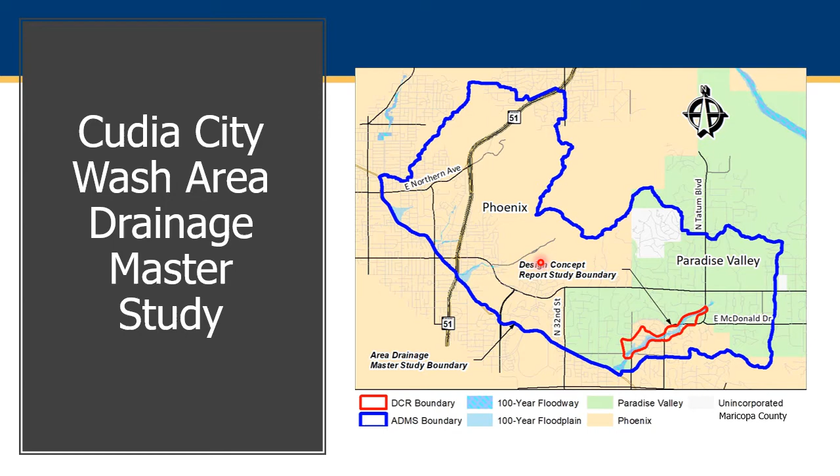The study area is approximately 14 square miles, and as you see on the map, it is located within a small portion of unincorporated Maricopa County area, the Town of Paradise Valley, and the City of Phoenix. Why are we doing this study? The district decided to prioritize this study for the following reasons. This watershed has not been studied since 1994. New development has occurred within this watershed. Also, new technologies are available to create more accurate mapping, hydrology, and hydraulic analysis. Since the summer of 2014, homes and infrastructures in the study area have experienced increased flooding. Awareness of flood hazards and risks can help residents reduce risk of injury, death, and property damage.

The following are the study goals and objectives. As I mentioned earlier, the study was completed in 2020 and was done as part of Phase 1. Currently, we are working on Phase 2 and preparing the design concept report for Cudia City Wash Echo Canyon Zone 4. This wash was identified as a potential significant flood hazard area in the study phase. As you see on the map, this is the location for the Zone 4 project, and it is within the City of Phoenix and the Town of Paradise Valley jurisdictions.

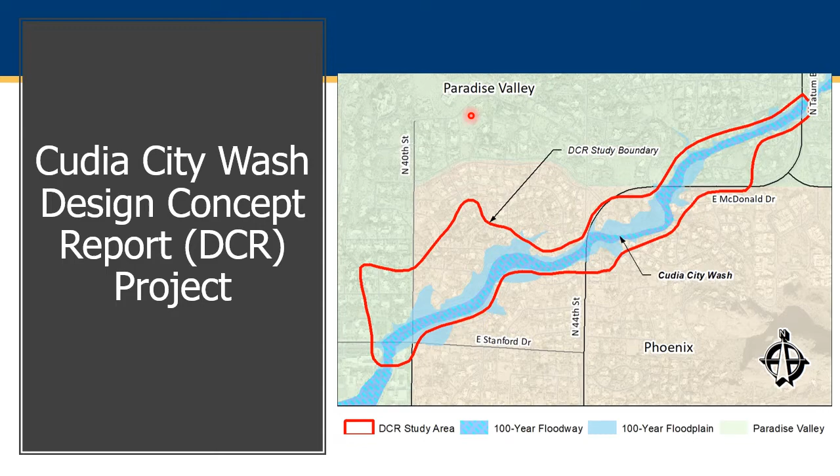The project goals are revising FEMA-designated flood zones as necessary to better define the flood risks, identifying potential solutions and costs to reduce flood risk by working with the City of Phoenix, the Town of Paradise Valley, HOAs, and residents. Based on the fund availability, we will determine when and how to proceed with the mitigation plan.

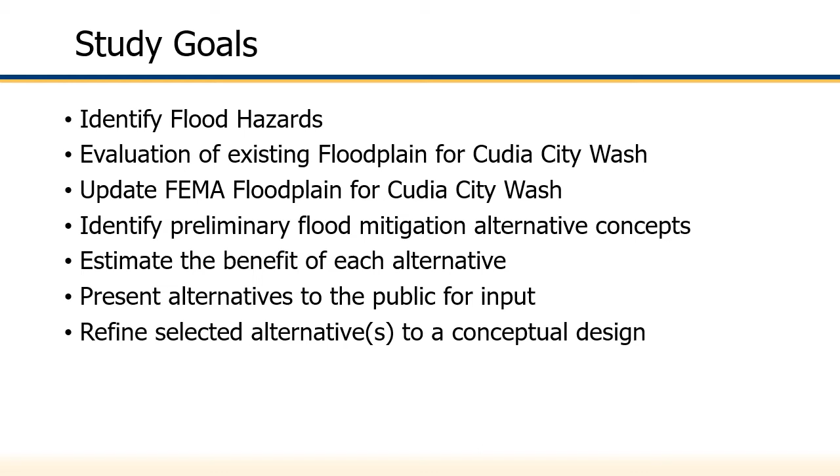As part of the Phase 2 study, we will also be conducting public outreach to seek public input for the developed mitigation alternatives. I will go over what has been completed to date and the project's next steps. We have created a comprehensive database of critical information, including known flooding and drainage areas from the City of Phoenix, the Town of Paradise Valley, stakeholder interviews, and comments received at the May 2019 public meeting.

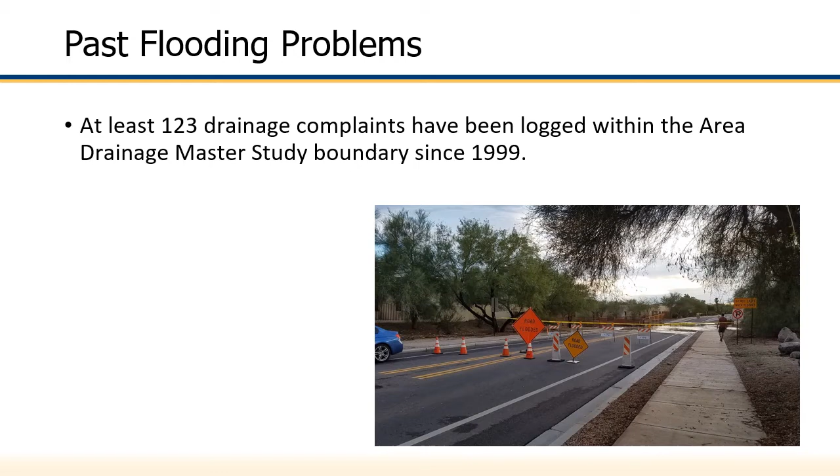We developed high-level recommended solutions to mitigate flood hazards for the identified flood-prone areas. And we evaluated FEMA floodplains within this watershed for potential to redelineate the existing one.

The next steps are to seek public input of the potential mitigation alternatives that were developed and are presented at this public meeting. Comments and recommendations from the public will be evaluated by the project team. We want to develop 15% plans associated with cost estimate and reports to mitigate the flood hazards and reduce the flood risk. Another public meeting will be conducted to review the draft FEMA floodplain redelineation and to share the recommended alternatives. Further technical analysis of the proposed alternatives will be required at the design stage.

And with that, I will hand the floor to our consultant, Rob Lyons from J.E. Fuller Engineering firm. Thanks. Hello, my name is Rob Lyons. I'm a civil engineer who works for J.E. Fuller Hydrology and Geomorphology, and we're currently under contract with the Flood Control District of Maricopa County to do the technical analysis for this design concept report.

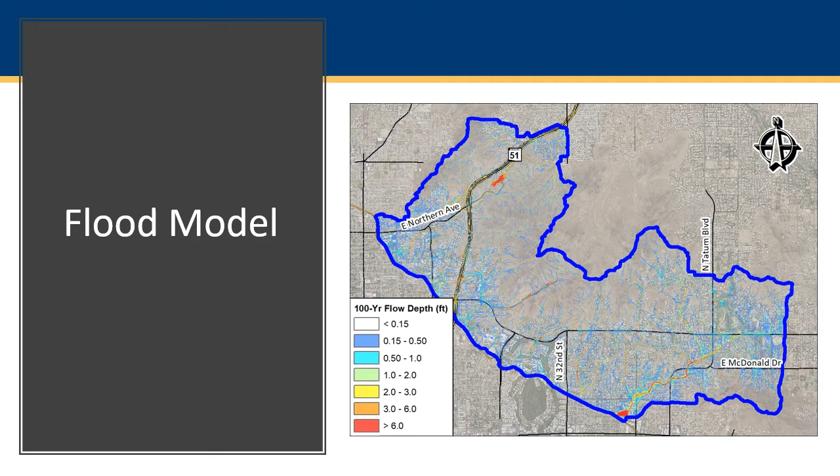A detailed flood model was developed during the Cudia City Wash Area Drainage Master Study that Lana previously mentioned, so we were able to hit the ground running using a model that was already developed. This model can simulate many types of storms, including actual storms that have happened around the Phoenix metro area, or it can model synthetic storms like the 1% annual chance storm, which is most well known as the 100-year flood. The 100-year flood, or the 1% annual chance storm, is the storm that has a 1% chance of happening in any given year.

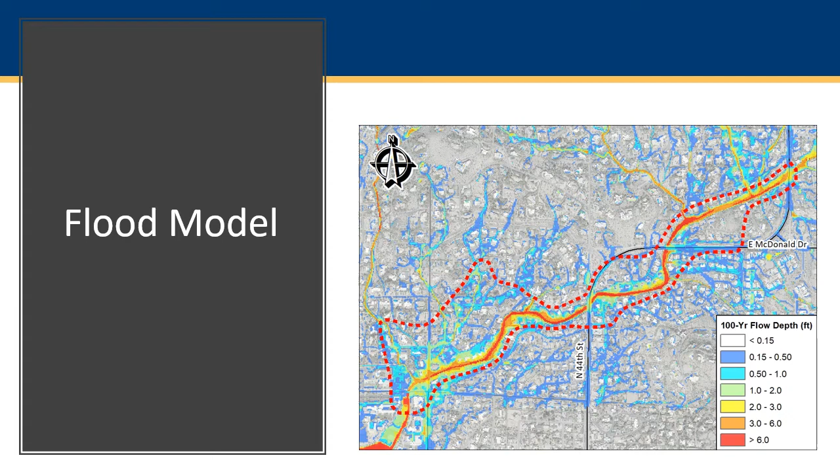This slide shows a zoomed in view of Cudia City Wash and the design concept report study area. You can see it goes from basically the Phoenix Country Day School on the downstream side to Tatum Boulevard on the upstream side. And also on the slide, you can see the 100-year model flow depths.

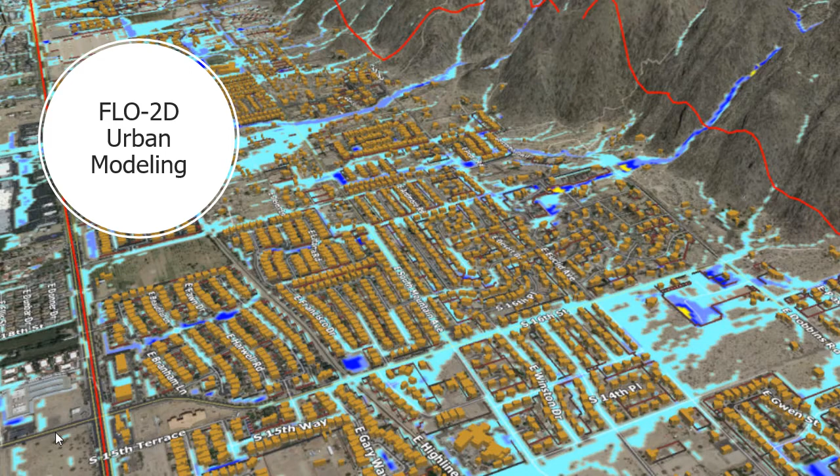The flood model that I mentioned is a two-dimensional model, specifically FLO-2D, which is capable of simulating both rainfall, infiltration, and flood routing. This image is from another study that the Flood Control District performed several years back, which simulates the floodwater running off South Mountain and inundating urban areas within South Phoenix.

The FLO-2D model is a very detailed model that's grid-based, and this particular model uses a 15 by 15 foot grid. So for each grid, you have model input such as terrain, infiltration, rainfall, culverts, buildings, walls, etc. And then the output is just as detailed with flow rates at each grid, water depths, velocities, or the speed of flow, and the direction of flow. The Flood Control District has been using this model for over 10 years and has found that the results are better than all past software applications.

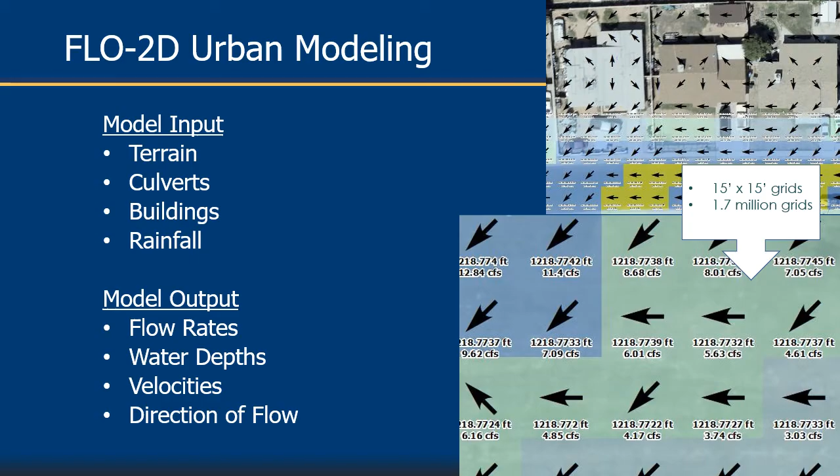This is a 3D animation of the flood model, or the 100-year storm, and we're zoomed out so you can see that the runoff's coming off of Camelback Mountain, Mummy Mountain, and the Phoenix Mountains Preserve. The model creates output at every 5-minute interval, so you can use the output or the flow depth results and overlay them in Google Earth to get a picture of where the source of the runoff and the flooding is coming from, as well as how the runoff is making it through the stream system.

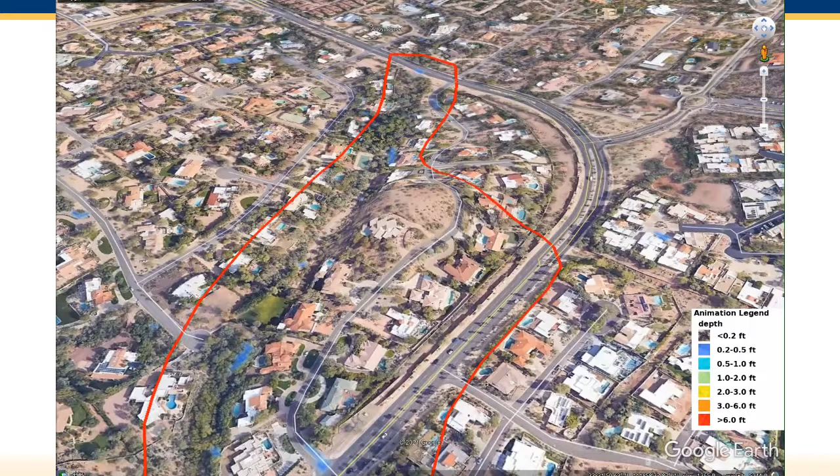Now we'll zoom in on different portions of Cudia City Wash. So this is the section that's in between Tatum Boulevard and McDonald.

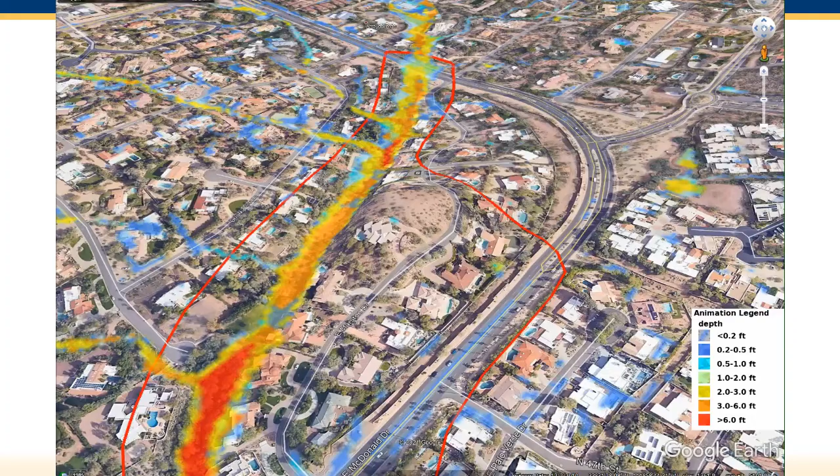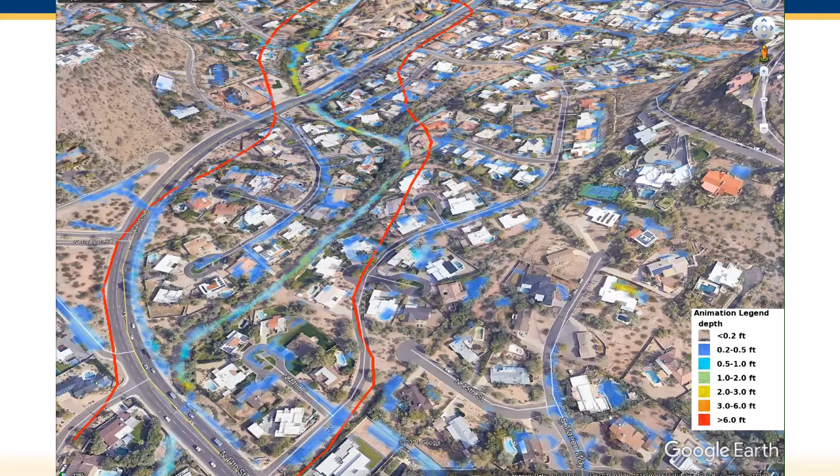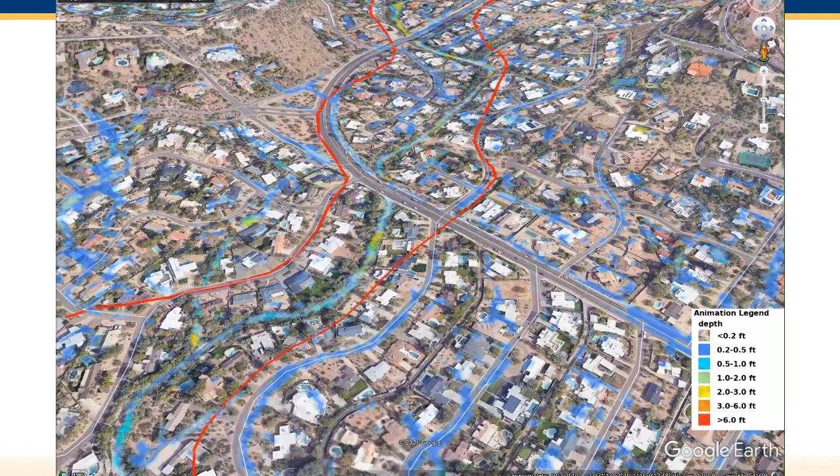And now we're moving in between McDonald and 44th Street. And here you can see that during the beginning of the storm, the water is mostly contained within the main channel, but as the flood starts to rise, it goes out into the floodplain and the overbanks. So this section is downstream of 44th Street. And now we're moving at the downstream end of the study near the Phoenix Country Day School at Stanford Drive.

A floodplain evaluation was initiated with the DCR to compare the FLO-2D model results to the existing FEMA floodplain. The results indicated that the existing FEMA floodplain may overpredict the 100-year flood extents. Therefore, the district, Town of Paradise Valley, and City of Phoenix agreed that the floodplain should be revised. This should have the result of removing some properties from the floodplain and potentially eliminating the requirement for flood insurance.

The draft floodplain should be complete in the fall of 2021, and the district, town, and city intend to present the results to the public before it gets formally submitted to FEMA. If all goes as planned this winter, the package could be submitted to FEMA for review and approval. Given that it's a federal government agency, it's hard to predict the number of comments they may have or revisions required and the approval process. So we're tentatively estimating the fall of 2022 for FEMA approval, and then the spring of 2023 for actually updated effective floodplains on the maps.

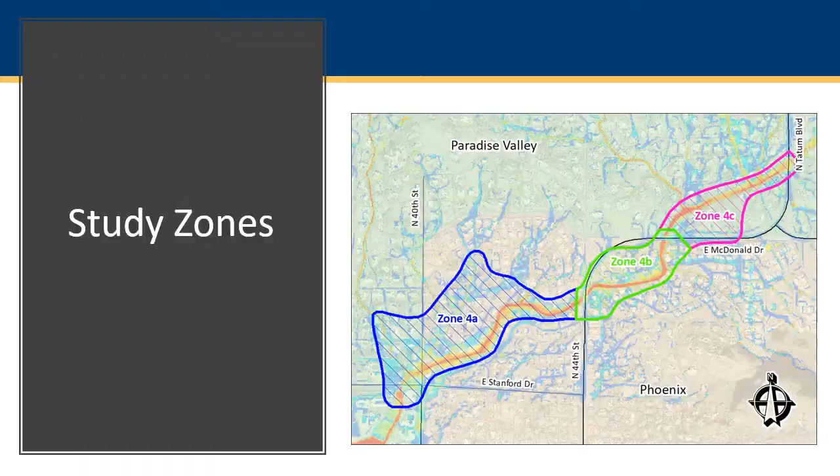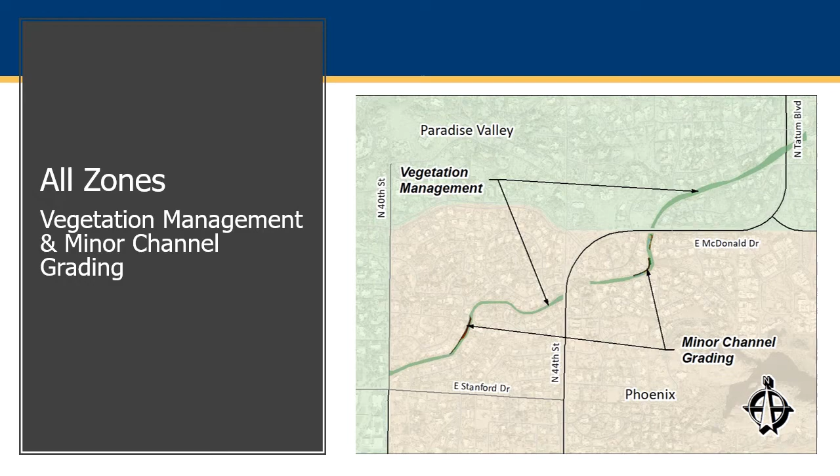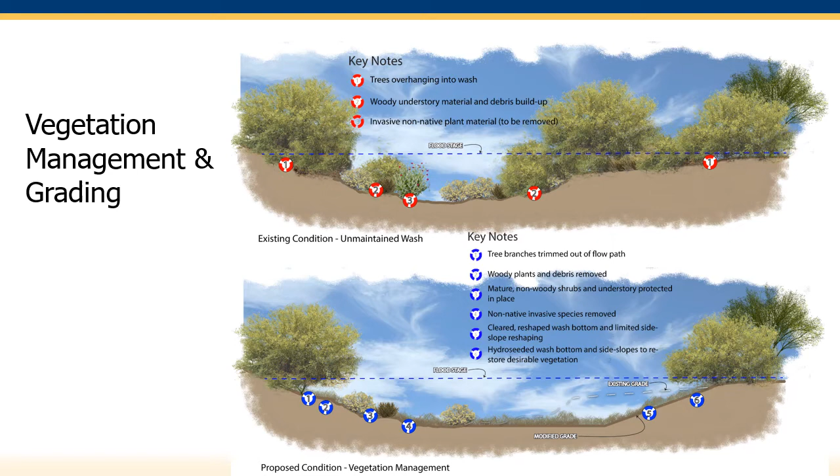The first alternative I'd like to present actually spans all 3 zones, 4A, B, and C, and we're calling it the vegetation management and minor channel grading alternative. There are 3 locations that would benefit from some minor channel reshaping. The vegetation removal would be limited to non-native or invasive species, and then trimming large branches and debris that's down in the low flow channel that's obstructing flows. This alternative would require the cooperation of the majority of homeowners to make sure that the vegetation is maintained.

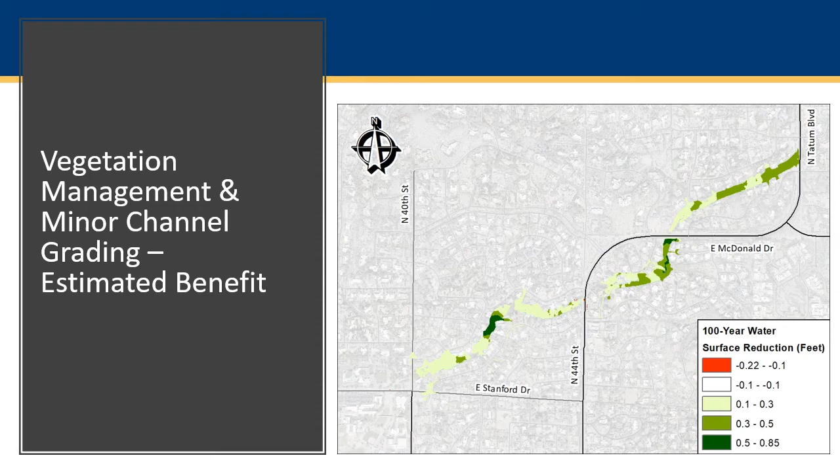The technical team has simulated the hydraulic benefits of this alternative. This slide shows the flood depth reduction assuming the project was undertaken. So for example, in the 100-year flood, flow depths could be expected to drop as much as 0.85 feet or 10 inches. That's in the darker green colors. But the majority of the wash would see a depth reduction of less than half a foot or 6 inches. So there is a noticeable benefit in maintaining the wash.

The next alternative is between Stanford Drive and 40th Street within Zone 4A. This slide shows the combination of two alternatives. The first is improving the culvert under Stanford Drive. The current culvert inlet north of Stanford Drive causes flow restriction, and floodwater can overtop Stanford Drive in larger storm events. The culverts themselves would not be replaced because they actually have a lot of capacity.

The second part of the alternative is channel improvements and grading in the east floodplain, which can improve the performance of the channel in the culvert inlet. This grading would be performed on the Flood Control District of Maricopa County owned land. The black line work that you see on the figure shows the boundary of the Flood Control District land.

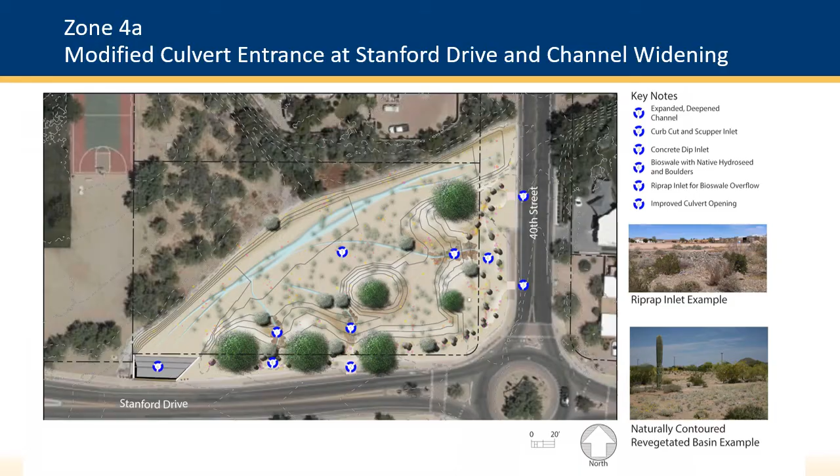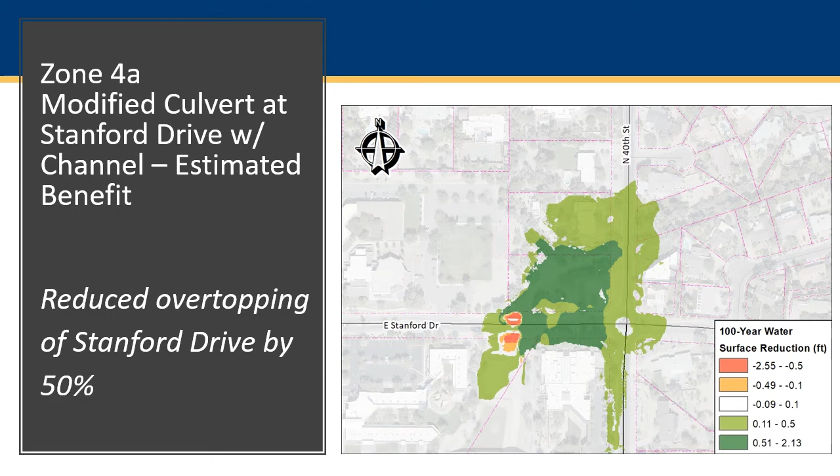This slide shows again the reduction in the 100-year water depth. You can see up to 2 feet of depth reduction within the vicinity of the project. The overtopping flow of Stanford Drive caused by the 100-year flood would be reduced by 50%. So therefore, this overtopping of Stanford Drive would become a more rare event and would probably only occur in very large storms.

The next alternative also applies to Zone 4A and would mitigate flooding on large tributaries to Cudia City Wash coming from the north. This alternative consists of the addition of underground storm drain pipes along existing roads. There are 3 storm drain options, which you can see on the legend in the lower right hand corner of the slide. The storm drain alignments are strategically located to intercept floodwater and reduce the flood hazard downstream. So the idea here is to pick up water as far upstream as you feasibly can, so that you get the most benefit of reducing the flood hazard downstream.

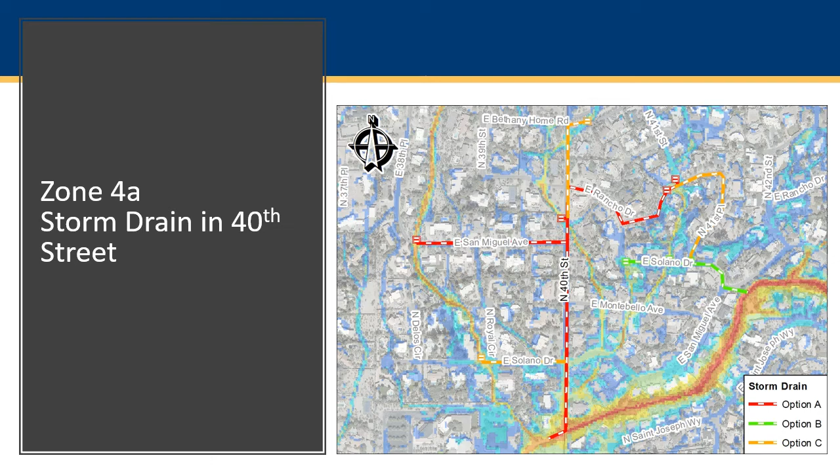As with before alternatives, this slide shows the reduction in the 100-year water depth. As expected, the depth reduction is downstream of where the storm drain inlet locations would be. So with this alternative, you can see that the flow depths are reduced by as much as 0.6 feet or 7 inches.

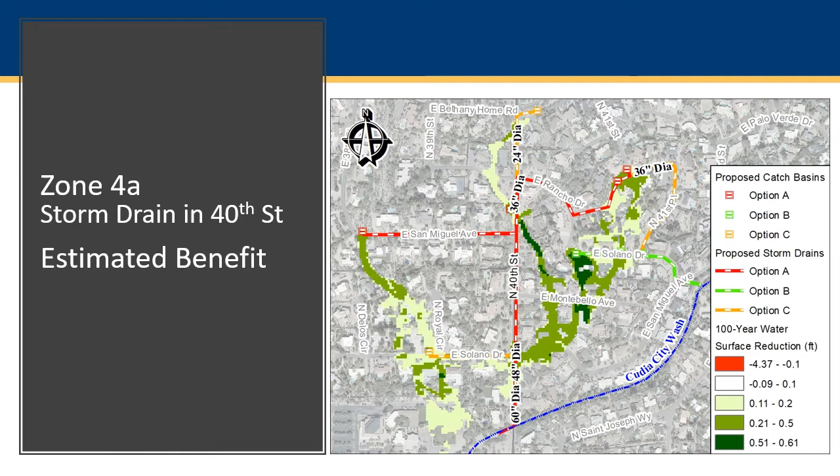The next alternative is within Zone 4B and has to do with the existing culvert underneath 44th Street along Cudia City Wash. The existing culvert isn't sufficient to pass the 100-year flow, or even flows not quite as large as the 100-year flood. So this alternative looks at increasing the capacity of the culvert by lowering the bottom of the culvert and effectively increasing the height of the culvert.

And to do this, we have to keep in mind maintenance considerations. So to keep sediment out of the culvert, you have to basically do some channelization up and downstream, which is shown here on this profile. And it would result in the need of a drop structure on the upstream end to accommodate that lowering of the wash.

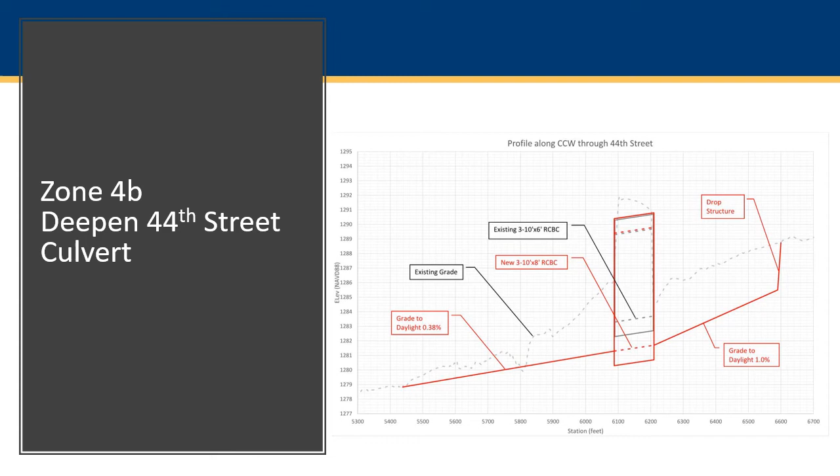This slide here shows the benefit of this alternative. You can see again 100-year water surface reductions, and these reductions result in up to 2 feet of lowering, and of course less frequent overtopping of 44th Street.

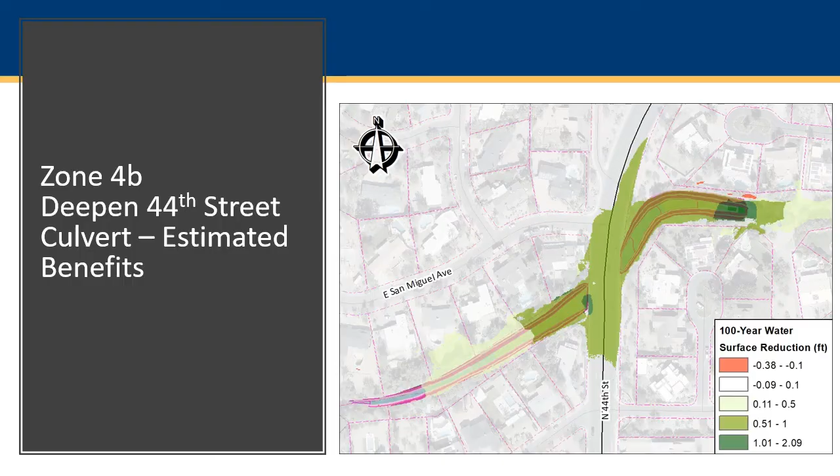I'd like to reiterate that none of these projects have or will be authorized for construction in the near future. There is currently no funding in place for any of these improvements that I've presented. The city and town have to weigh the benefit and cost of these projects with all of the other infrastructure needs of the entire community. However, your input is needed to help the city and town identify projects that are acceptable and that could be planned for if and when funding becomes available.